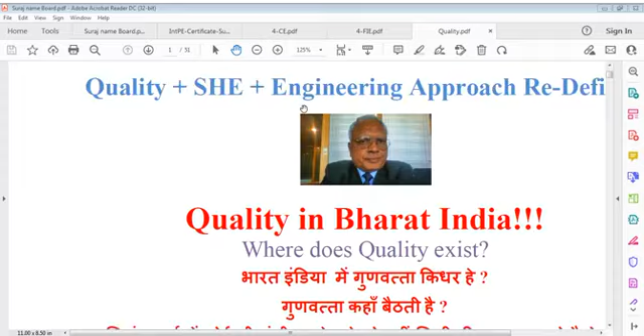And also you can say having certain kinds of statutory basis or competent basis or consistent basis, and then to achieve the most important word where I'm inclined to invest my time and my energies, and we can say that is called quality, particularly in ours, and that is Bharat, India.

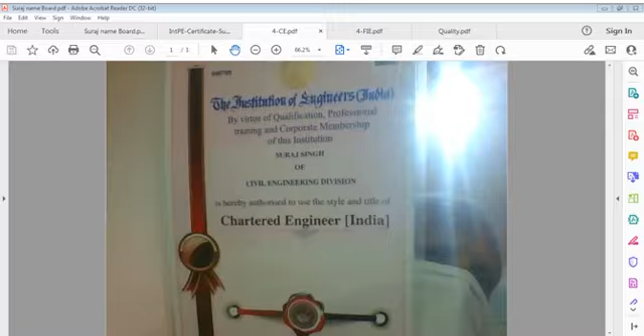I always try to find, not only now but before also, many years back, the location of quality, the address of quality, but unfortunately I could not chart it out. I don't know where it locates itself. I don't know why, and I could not find that. It's not a dialogue. It's not assumption. It is practicality I'm trying to share with you.

Because I consider as a professional, I consider as a human and a citizen of this country, and of course belonging to this earth. You may stay anywhere in this world, you are indirectly a real citizen of this world, and real citizen means I cannot insult earth. Earth is my parent. I don't call it Mother Earth only because Father Earth is also mine.

I use materials given by or delivered by earth to everyone, not directly but directly and indirectly. I cannot insult any material that earth gives me and also gives to this world.

Earth gives us whatever we require, even this body we have. Everybody has this body, it is given by earth. We cannot deny this fact. Whatever food we consume, it is contributed by earth every day. Every hour we respire, we breathe. It's because of earth as a part of nature.

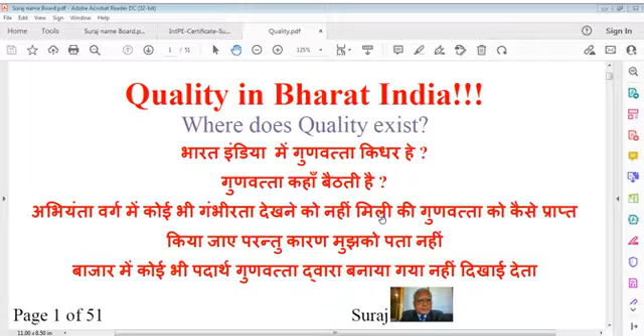Where does quality exist? If we have already decided to spoil nature, and we have done it successfully, whatever is negative, whatever is adverse, human has been very successful in destroying the air, destroying water bodies, the sea and ocean, destroying our rivers, and destroying our soil.

We have been very successful. We have been very successful in destruction of humanity by successfully producing the nuclear bomb. Of course, nuclear energy is different for electrical production or some other purpose, but when it's nuclear destructive power, which we call bombs, explosive bombs, that's the point where we destroy ourselves. It's nothing but a work of the devil.

Are we devils? Of course we are scientists. They are scientists, but the scientist is ready to kill people. We want to produce weapons. We want to produce bombs. What for? To please God, or to kill people?

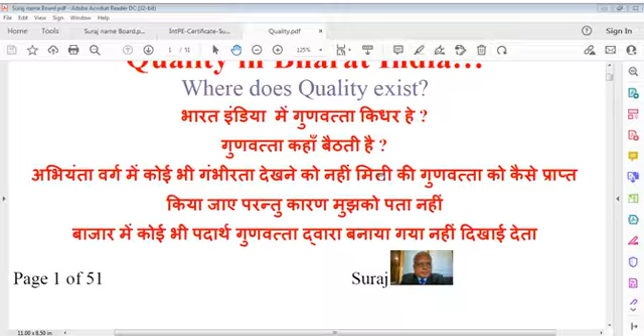Then if you want to kill others, how can you say you can help health, safety, and get quality? All advanced countries - USA, England, France, China, and many more - are always in search of business, of weapons. They are in search of investing money and doing business with others for this purpose. Survival depends on this, on destructive arrangements that lead them to such involvement.

Destruction of humanity - you may call it criticism, but I say remember, it is very easy to break something. It's very easy to break something, but it is very difficult to make something. You have to decide which one is preferable. We have to elect for destruction or breaking, or we have to elect for construction or making.

For me as a person, and for millions of yourselves as persons, engineering is a world where making is done, where construction is done. Design is also part of construction activity, because without design we cannot construct anything. This point we have to realize. Design is the start of construction, and those engineers who understand this are better than those who don't. Same way, health and safety are very important factors.

If we have to survive, we require good health, and for good health we require a good environment. For that, if we want to use good health and environment, and keep ourselves healthy and environment-friendly, we have to be safe from each requirement. We have to keep ourselves protected at all times with intelligence and not with emotions.

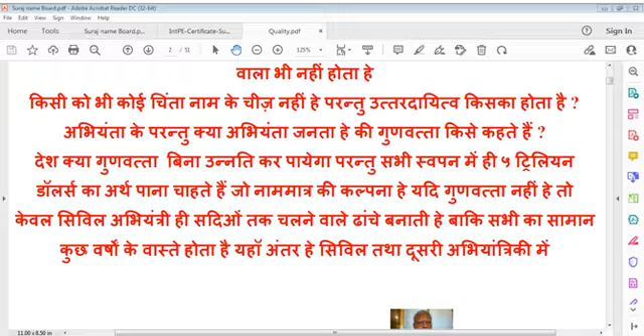And that's what I say, we have to be very serious about that issue. Engineering is full of communications and coordinations. And where this doesn't happen, you can say it means non-seriousness exists. World is different and life is different. Culture is also different. But humanity is not different. Body is not different. Quality is not different.

We have to be serious about this matter. Serious in what sense? Serious in every sense. You may say that I am just talking. No, I'm not talking, I'm thinking. Remember, when I talk without a script, it's my habit not to write a script. If I write a script and then present something, that means it's well thought of, it's well planned. I don't want to use any sentence which is not required. I want to use well-weighed words and terms only if I write a script and present.

But now I'm just presenting, using certain files only for reference. What comes to my mind, that is my achievement. It doesn't matter whether I am a good speaker or a bad speaker. Question is, what is talked of, what am I conferring about. Of course it's one way, you're not responding, no problem. But always there is a delay, there's a time to get some destiny.

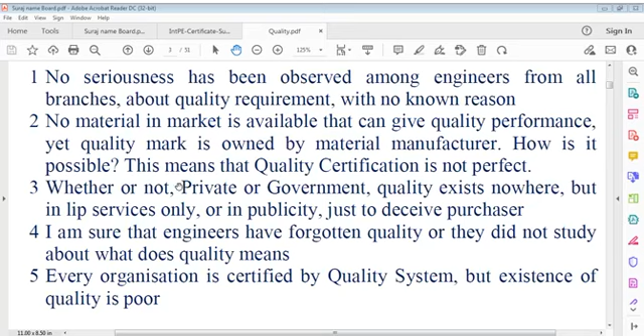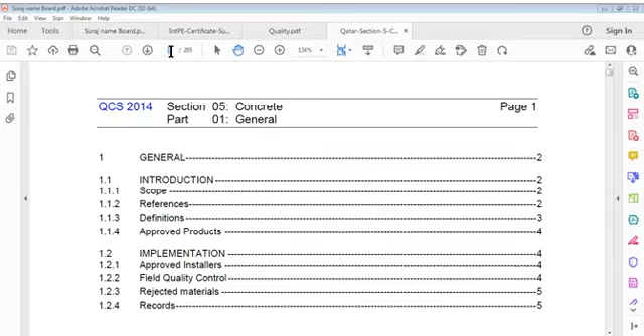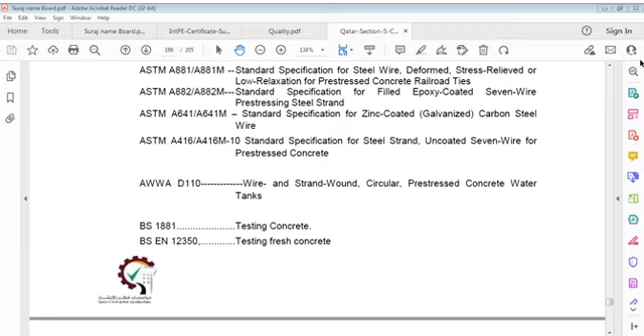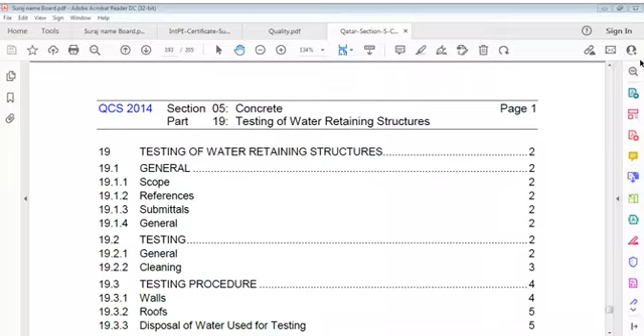That's why I always refer to concrete and contracts. I used this concrete last time I discussed with you, and it was a continuation of discussion about certain specifications. This was about concrete specifications, and we talked about pre-stressed concrete, anchorages, jacking equipment, tensioning, grouting, and mixers. We are somewhere now, I think we dropped somewhere, right? I guess we don't remember where it dropped.

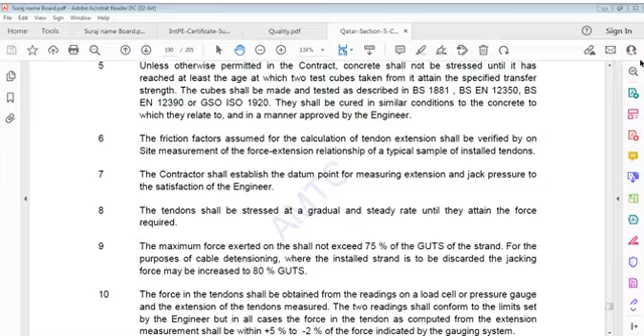And grouting, I think let's start that. Tensioning, jacking equipment, let's go way back. I think wires and strands, we talked of concrete, pre-stressed concrete, wires and strands.

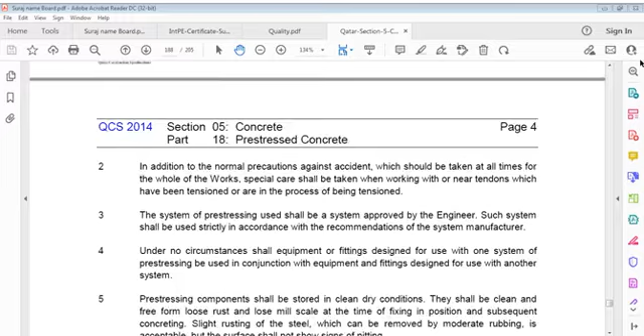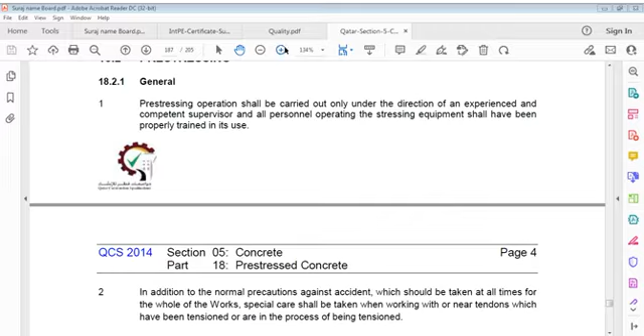I forget actually, that's my problem. Let's say pre-stressing, here it is. Pre-stressing operation shall be carried out only under direction of an experienced and competent supervisor, and all personnel operating stressing equipment

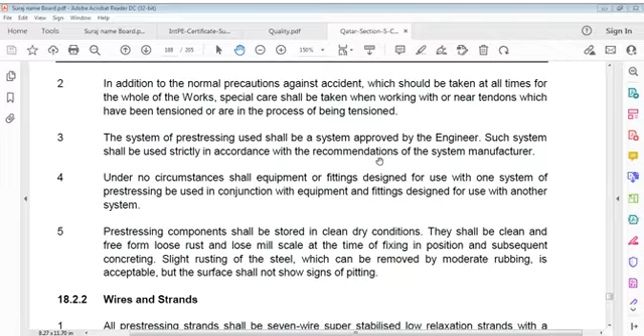shall have been properly trained in its use. In addition to normal precautions against accident, which should be taken at all times for the whole of works, special care shall be taken when working with or near tendons which have been tensioned or are in the process of being tensioned. The system of pre-stressing used shall be a system approved by the engineer.

Such system shall be used strictly in accordance with recommendations of the system manufacturer. Under no circumstances shall equipment or fittings designed for use with one system of pre-stressing be used in conjunction with equipment and fittings designed for use with another system.

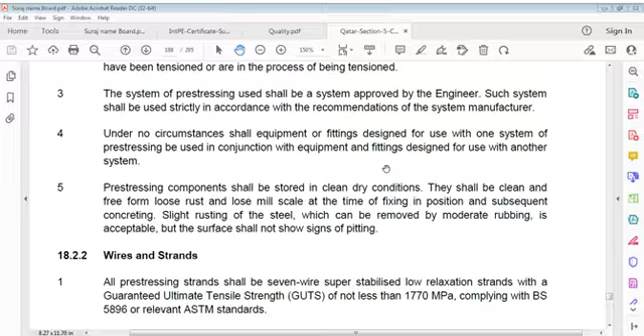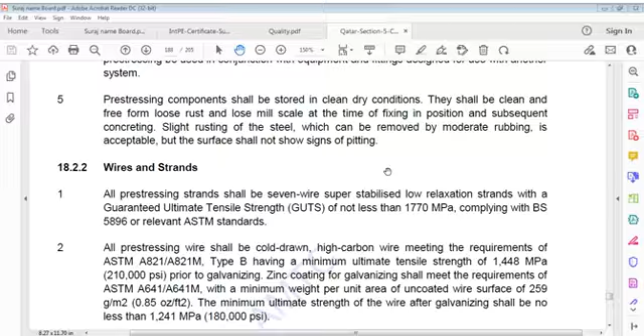We have studied this. Pre-stressing components shall be stored in clean, dry conditions. They shall be clean and free from loose rust and loose mill scale at time of fixing in position and subsequent concreting. Slight rusting of steel which can be removed by moderate rubbing is acceptable, but the surface shall not show signs of pitting. So we have done this.

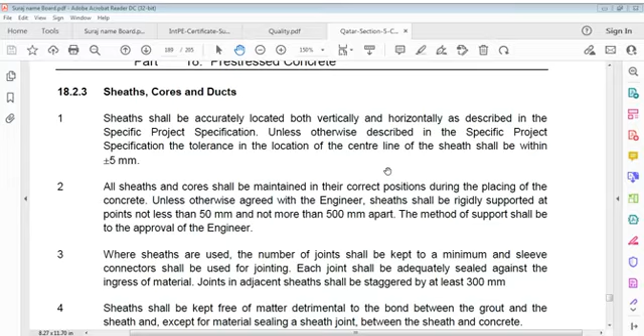Located both vertically and horizontally as described in specifications unless otherwise described in specs. So we have done it also, leave it.

Anchorages we have done. Jacking equipment, let us see what it says so that we can say that all jacking equipment used for stressing operations shall be of the type applicable to the system adopted.

Jacks and pumps shall be calibrated at an independent facility in the presence of the engineer. Before beginning stressing operations, calibration of equipment shall be effected at 6 month intervals for equipment permanently present on site.

Whenever new equipment is brought to site or equipment is removed and returned or serviced, recalibration of equipment as described shall be required. So all gauges, load cells, dynamometers and other devices used for measurement shall have a reading

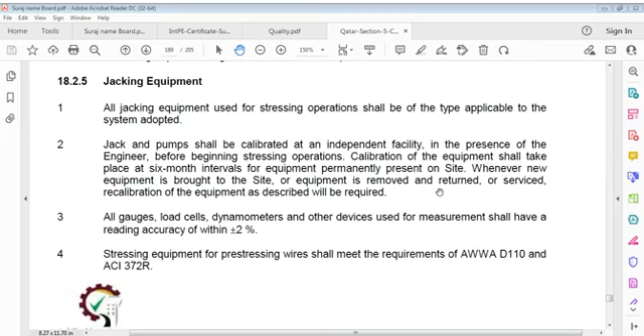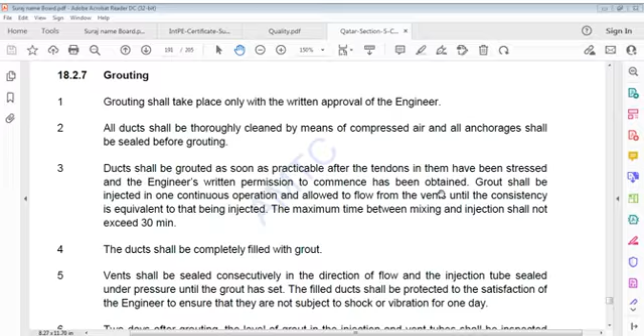we can say we have to then go to grouting. I think grouting also we have done or not. Grouting shall be effected only with written approval of the engineer. All ducts shall be thoroughly cleaned by means of compressed air and all anchorages shall be sealed before grouting.

Ducts shall be grouted as soon as practicable after tendons in them have been stressed and engineer's written permission to commence has been obtained. Grout shall be injected in one continuous operation and allowed to flow from vents until consistency is equivalent to that being injected. Maximum time between mixing and injection shall not exceed 30 minutes.

I repeat this, point 3. Ducts shall be grouted as soon as practicable after tendons in them have been stressed and engineer's written permission to commence has been obtained. Grout shall be injected in one continuous operation and allowed to flow from vents until consistency is equivalent to that being injected. Maximum time between mixing and injection shall not exceed 30 minutes.

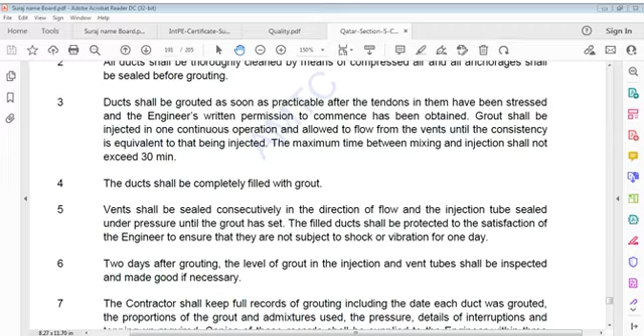Contractors shall keep full records of grouting, including date each duct was grouted and proportions of grout and admixtures used, pressure details, interruptions and topping up required. Copies of these records shall be supplied to engineer within 3 days of grouting.

Pre-stressing wires shall be protected against corrosion and other damage by a shotcrete cover coat meeting the requirements of references AWWA D110 and ACI 372R.

Grout mixer shall produce a grout of colloidal consistency. Grout injector shall be capable of continuous operation with a sensibly constant pressure up to 0.7 MPa and include a system of circulating or agitating grout whilst actual grouting is not in progress. All baffles to pump shall be fitted with sieve strainer size BS 14.

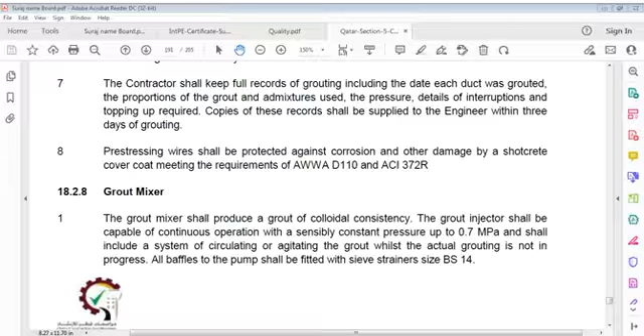Equipment shall be capable of maintaining pressure on completely grouted ducts and fitted with a nozzle which can be locked off without loss of pressure in the duct.

Pressure gauges shall be calibrated before these are first used in works and thereafter as required by engineer. All equipment shall be thoroughly washed with clean water at least once every 3 hours during grouting operations and at end of use for each day. Contractors shall ensure that standby grouting equipment is available in event of breakdown.

Grout trials. Contractors shall carry out grouting trials to satisfaction of engineer before actual grouting takes place.

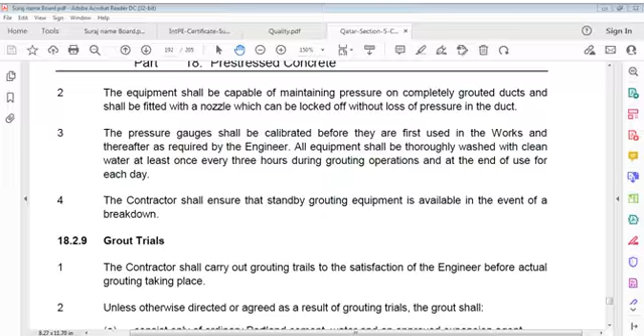Unless otherwise directed or agreed as a result of grouting trials, grout shall consist only of ordinary Portland cement, water, and an approved expansion agent.

Grout shall have a water cement ratio as low as possible, consistent with necessary workability. Under no circumstances shall the water cement ratio exceed 0.4, nor be subject to bleeding in excess of 2% after 3 hours or 4% maximum, when measured at 18 degrees Celsius in a covered glass cylinder approximately 100 mm diameter with a height of approximately 100 mm, and water shall be reabsorbed after 24 hours.

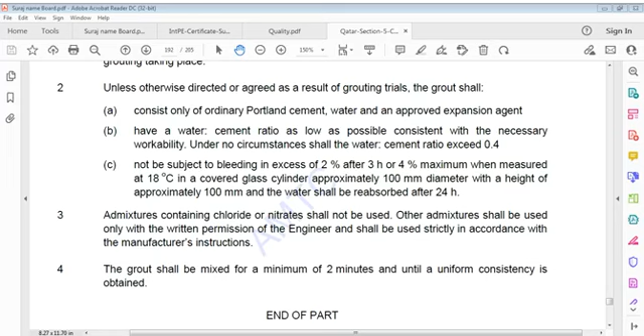This was pre-stress concrete, a very important part, though it's not very common, but a very important one. Now we go to...

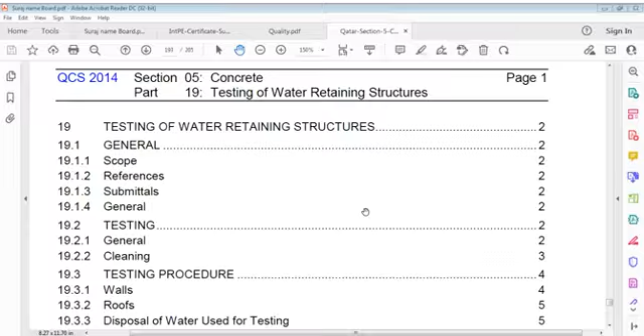Testing of water retaining structures, which is a very important part, and generally, as I understand, this refers to BS 8007. We'll see what it is. This is a concrete chapter, chapter 19, part 19, in this concrete specifications, testing of water retaining structures. In this we have general, that is scope, references, submittals, general.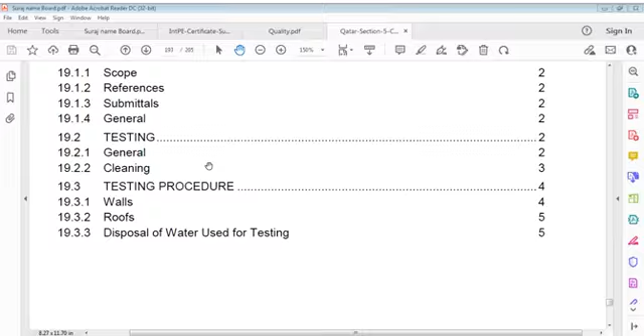In testing part we have general and cleaning. In testing process we have walls, roofs, disposal of water used for testing, and we have here now testing of water retaining structures, and this in general.

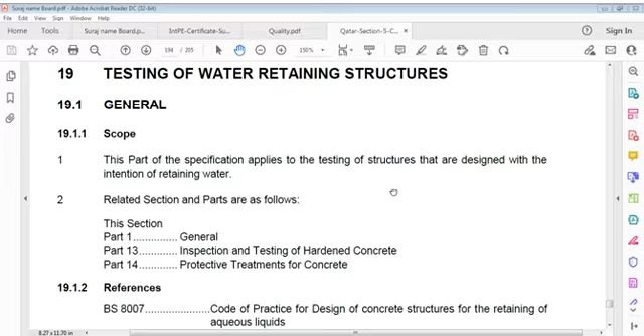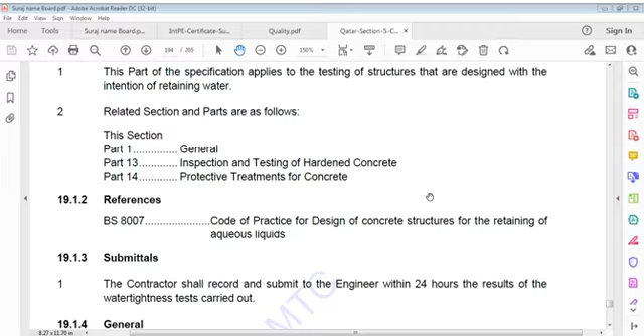This part of specification applies to testing of structures that are designed with intention of retaining water, and in this specification its related parts are general, inspection and testing of hardened concrete, protective treatments of concrete, and references BS 8007, that is Code of Practice for Design of Concrete Structures for retaining of aqueous liquids. Aqueous means water, you can say.

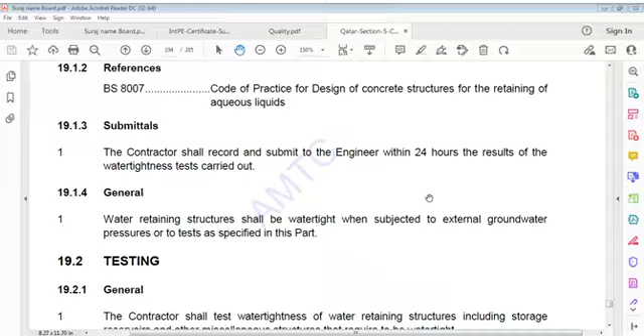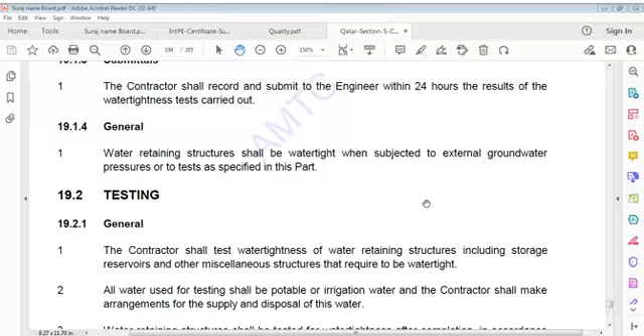Now submittals. Contractor shall record and submit to engineer within 24 hours results of water tightness test carried out. In general, water retaining structures shall be watertight when subject to external groundwater pressure or to tests as specified in this part.

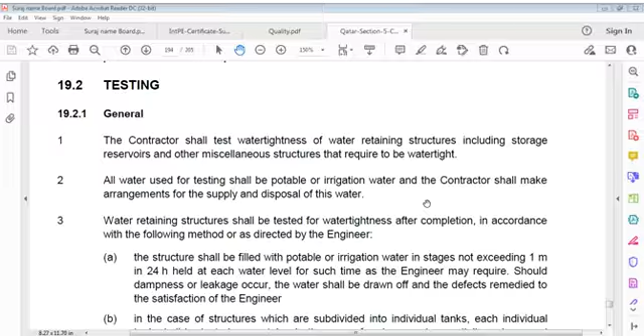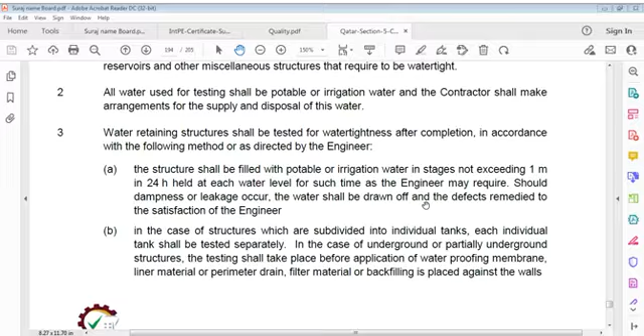Testing general. Contractor shall test water tightness of water retaining structures, including storage reservoirs and other miscellaneous structures that require to be watertight. All water used for testing shall be potable or irrigation water, and contractor shall make arrangements for supply and disposal of water used for test. Water retaining structures.

Water retaining structures shall be tested for water tightness after completion in accordance with the following method, or as directed by engineers. The structure shall be filled with potable or irrigation water in stages not exceeding 1 meter in 24 hours. It's a stepped process, you have to fill 1 meter height in 24 hours. 1 meter means depth of fill.

In 24 hours, the fill shall be held at each water level for such time as engineer may require. That fill, which will be 1 meter, should be held for a certain period of time as the engineer may require. Should dampness or leakage occur, water shall be drawn off and defects remedied to satisfaction of engineer. In case of structures which are subdivided into individual tanks, each individual tank shall be tested separately.

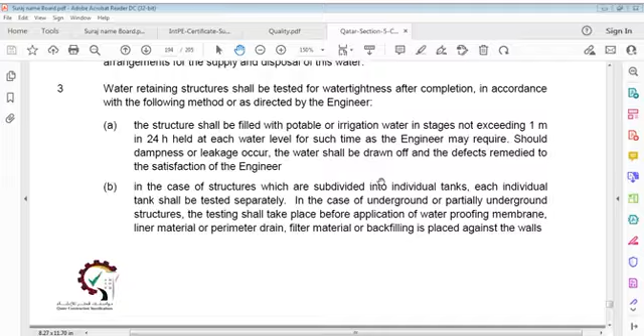I am repeating it because there has been some confusion on some sides about this issue. In case of hopper bottom tanks, this shall be taken to mean that no material is placed against vertical external walls of tank. Sloping walls of hopper bottom of tanks are assumed built directly against excavation apart from blinding concrete. No placing of material against walls shall be effected until the engineer has given written approval and acceptance of water retaining structures as watertight. Filling shall not be effected earlier than 28 days.

Filling shall not be done earlier than 28 days after casting of final sections of the structure, which will be stressed by filling of the structure. Very important point to remember: water filling shall not happen earlier than 28 days after casting of final sections of the structure, which will be stressed by filling of the structure.

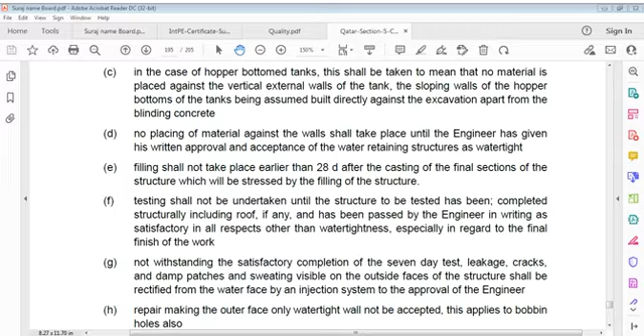Should a structure fail in test in the above respects of water tightness, the contractor shall immediately take further steps as may be necessary to ascertain the nature and position of defects or leakage, by emptying the structure.

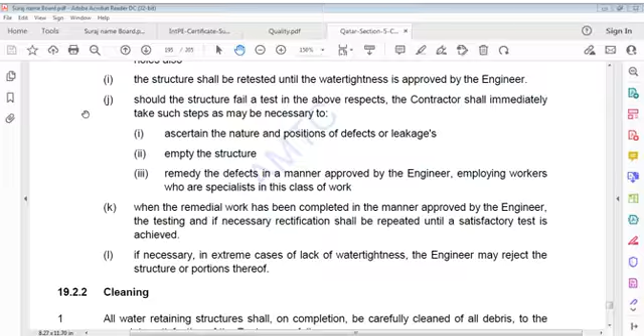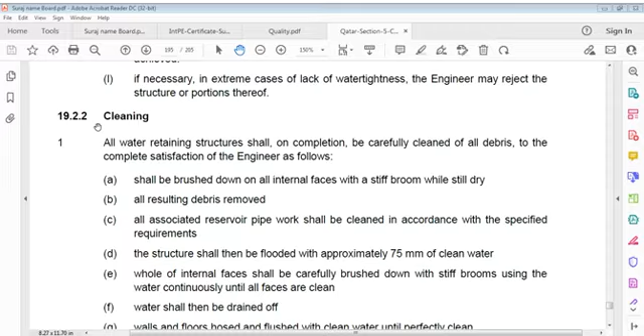Remedy defects in a manner approved by the engineer, employing workers who are specialists in this class of work. When remedial work has been completed in a manner approved by the engineer, testing and, if necessary, rectification shall be repeated until a satisfactory test is achieved. If necessary, in extreme cases of lack of water tightness, the engineer may reject the structure or portions thereof.

Cleaning all water tightness structures: all water retaining structures shall, on completion, be carefully cleaned of all debris to the complete satisfaction of the engineer, as follows. Shall be brushed down on all internal faces with a stiff broom while still dry.

All resulting debris removed. All associated reservoir pipe work shall be cleaned in accordance with specified requirements. The structure shall then be flooded with approximately 75 mm of clean water. The whole internal faces shall be carefully brushed down with stiff brooms, using this water continuously until all faces are clean. The water shall then be drained off. Walls and floors hosed and flushed with clean water until perfectly clean.

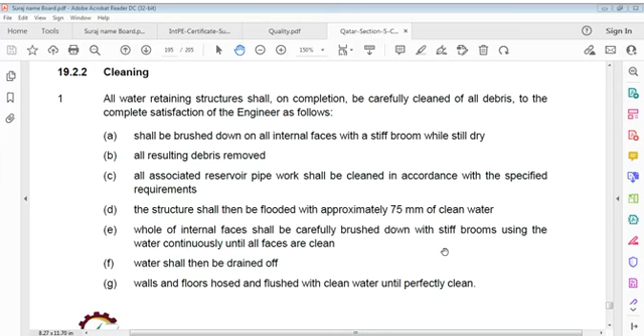Walls and floors hosed and flushed - we have to clean, meaning flush the walls. Floors hosed, walls and floors hosed and flushed with clean water until perfectly clean. So cleaning is done like you do in your home.

Then you have to do testing procedures. So your tank is ready, your reservoir is ready for the purpose of test, and you have to conduct the test.

Signals are down again, zero zero zero zero. Thank you Airtel for this. I'm trying to stop this work, this live video presentation. Some signals are there. Thank you again. What to do?

Walls after completion and cleaning of structure and all associated pipe work, contractor shall fill structure up to top water level and leave for a stabilizing period of 21 days.

Once you have cleaned all surfaces and any pipe work, you have to fill according to, as said before, up to top water level and leave it for stabilization period. We have already studied that we have not to fill more than 1 meter in 24 hours. After tank is filled, you have to keep that water for 21 days for its stabilization period in order to allow for absorption and autogenous healing to take effect.

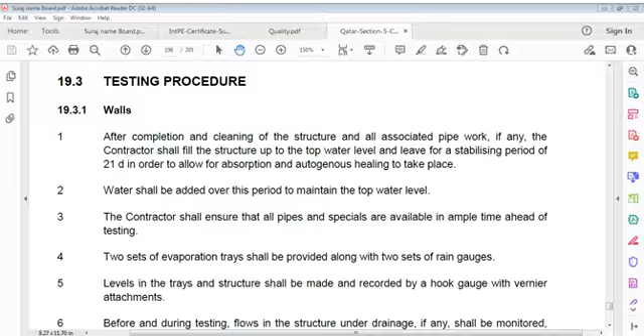Vernier attachment, where's that? Before and during testing, flows in structure under drainage shall be monitored, measured and recorded. Each under drain shall be numbered and observations reported by under drain number to facilitate analysis of data.

All leaks shall be repaired within 1 month of their detection.

On the 22nd day, two shallow watertight evaporation trays of area 0.4 meters square shall be filled with 75 mm of water and placed to float in the structure.

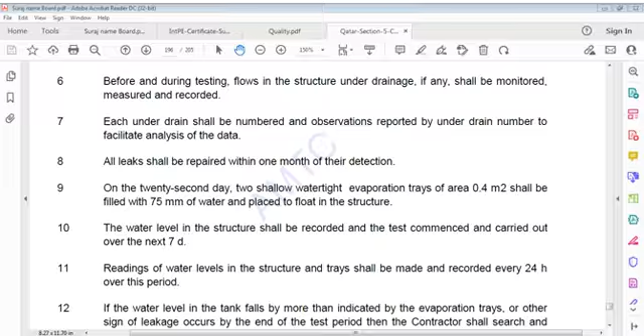If water level in tank falls by more than indicated by evaporation trays, or other sign of leakage occurs by end of test period, contractor shall search and mark all areas of defect.

Structure shall then be emptied and defects made good as specified herein. After completion of remedial measures, structure shall be refilled and tests repeated. This process shall be repeated until structure is watertight to the satisfaction of the engineer.

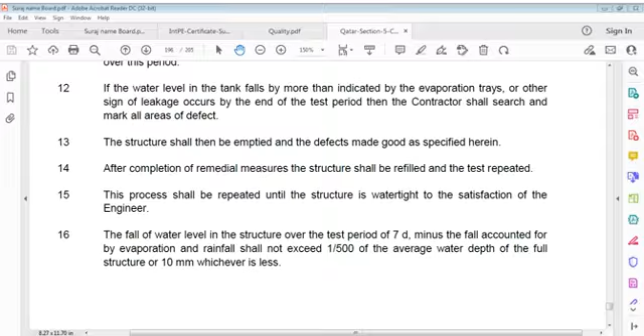Fall of water level in structure over test period of 7 days, minus fall accounted for by evaporation and rainfall, shall not exceed 1/500 of average water depth of full structure, or 10 mm, whichever is less.